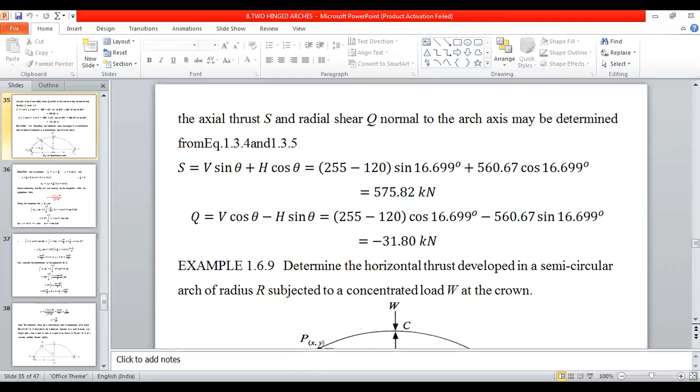So all of you see the geometric property of circle, and let us understand this problem a little bit. Trigonometric integration is required to solve the horizontal reactions.

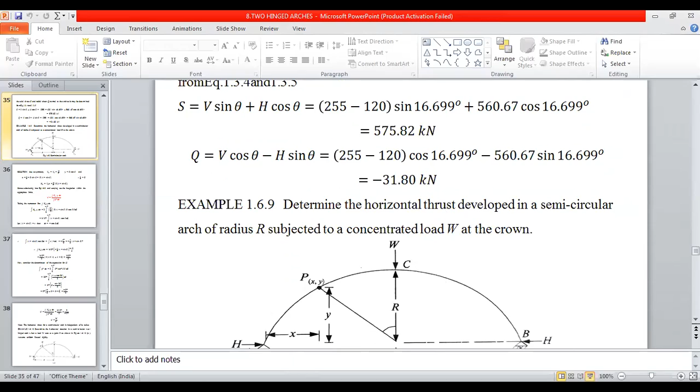See all of you, are you shared the slide? Are you seeing the slides? Yes sir, right.

Put heading: analysis of circular arches, two hinged semicircular arches. Write directly in the form of a question: determine horizontal thrust developed.

Yeah. This is the best one. Uh, right.

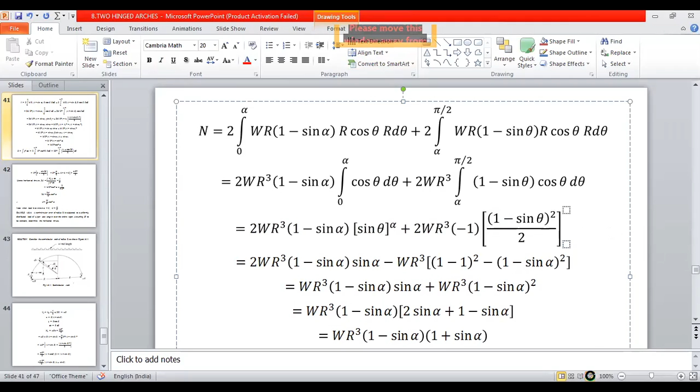Are you copying all these things, or do you do your own? It's a very simple integration, you do your own way. Did you copy? I may go to the second slide. Yes, sir.

So denominator value is pi r cube by 2. You are getting pi r cube by 2. The numerator value is W r cube cos square alpha. Then, but you know 2h, not h. 2h is equal to n by d because you are applying both sides, concentrated load applied on both sides at P and P1. That's why 2h. So 2h is equal to 2w by pi cos square alpha. This is the final solution, but h is equal to, 2 gets cancelled. H is equal to w by pi cos square alpha.

So if this load is applied at the crown, alpha will be 0. Then h is equal to w by pi. If the load is applied at point P at x distance from the left support, this is the horizontal expression. If load is applied at the crown, then alpha will be 0, therefore the horizontal reaction is W by pi. So it is independent of R when load is applied. Same derivation you will follow. Did you copy all these things?

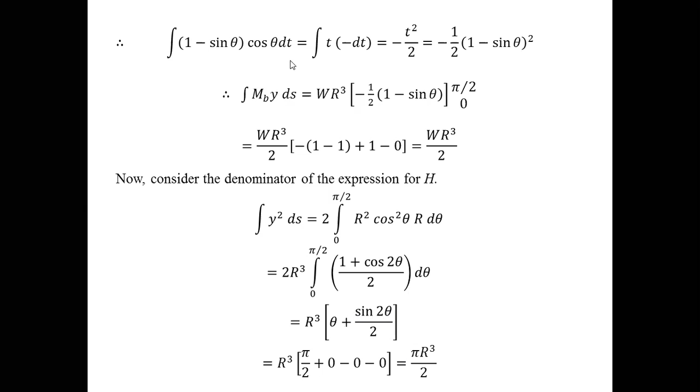Then you take the uniform distributed load. The first problem is anywhere on the arch, concentrated load anywhere on the arch, and second problem is the concentrated load on center. Arch is subjected to uniform distributed load, semicircular arch is subjected to uniform distributed load.

Let us take: determine a semicircular arch of radius r, subjected to uniform distributed load W per unit length over entire span. Assume EI is constant. Determine the horizontal thrust.

Are you seeing the screen? Yes sir, yeah. And the third problem will be uniform distributed load spreading over the entire span.

Let us copy this figure. In this figure you can understand better. You take at any point P or section X or P, it is making an angle theta with the vertical, and a small elemental length making an angle d theta, and this point the length is ds, and this point is kept at a distance x from support A, and rise is y.

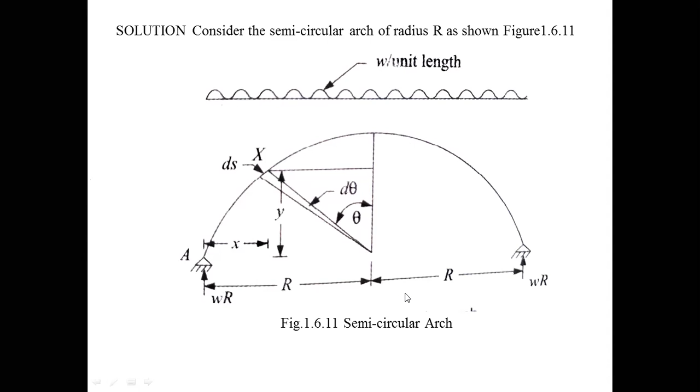Substitute all these things, the X value substitute, and simplify the numerator value WR square by 2 into 1 minus sine square theta. That 1 minus sine square theta is written as cos square theta. Then this is MB.

Then numerator MB into WR square by 2 into cos square theta, into X is equal to R cos theta, Y is equal to R cos theta, and ds is equal to R d theta. Apply the limit 0 to pi by 2.

Cos cube theta, you cannot integrate directly. So you take t is equal to sine theta, dt is equal to cos theta d theta, and I is equal to 1 minus t square dt. Do the simplification of integration this way, following the same process as before.

And you know the denominator y squared ds. How do you get it? How much do you get? Y square ds, as in the previous problem.

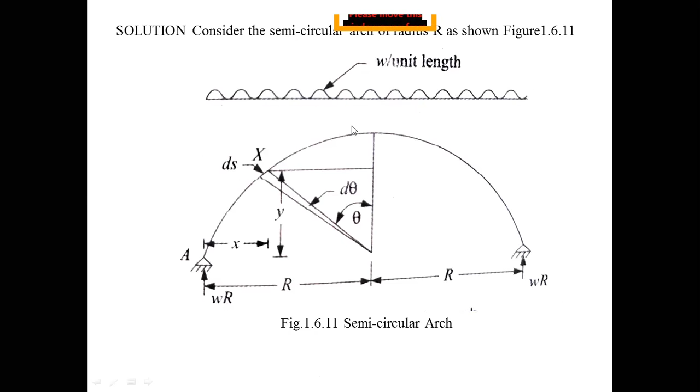You take the same procedure, symmetry, for this second problem, just as with the first problem W. What is the equation here? If a semicircular arch is subjected to half of the uniform distributed load, what is the expression for H?

Students? Hello? Hello? Yes sir. This is the expression 4/3 WR by pi in case of semicircular arch subjected to uniform distributed load. If the semicircular arch is subjected to half of the uniform load spread on half of the portion, students, please respond.

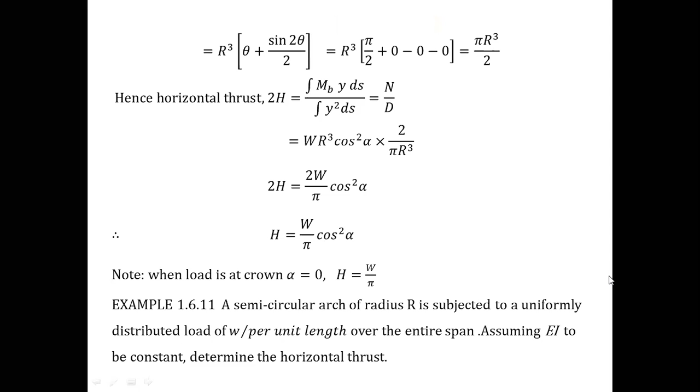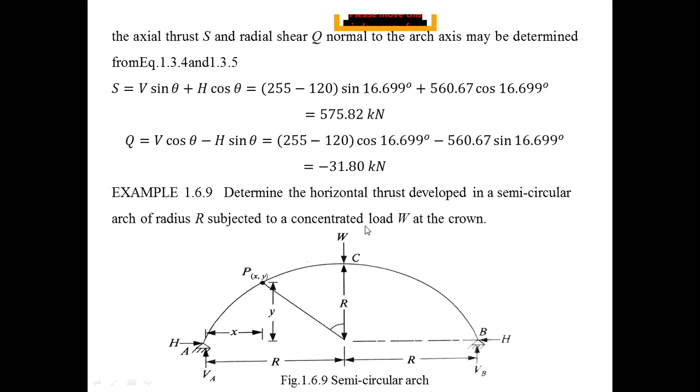Suppose for the first problem, W is equal to 150, R is equal to... and 2R is equal to 50 meters. Find HA and HB. Then you must take the whole problem and do this entire derivation with W, and finally apply all these things: H is equal to W by pi, and H is equal to 150 by pi gives the horizontal reaction. That's enough.

So, any doubts regarding the two-hinged circular arch? I will finish the third unit: two-hinged and three-hinged circular and parabolic arches, and segmental arches. I've covered these, including two-hinged circular and two-hinged parabolic arches. Actually, the examination question is the two-hinged parabolic arch, which is simple integration. Here too it's the same, but you must derive and then substitute. That is the major problem in two-hinged circular arches.

Have you any doubts? Otherwise I will stop here, and next class we will start the fourth unit, suspension bridges: cables and suspension bridges.

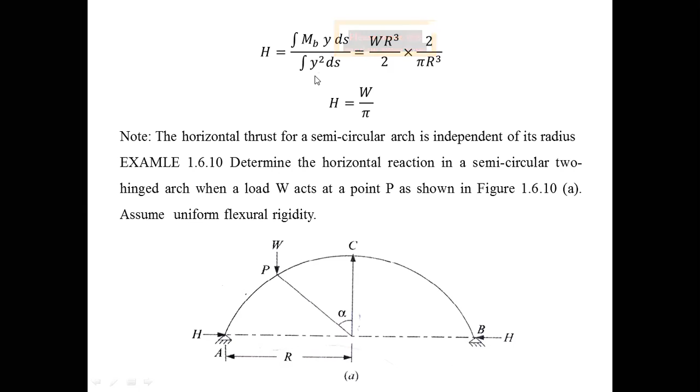Next class I will start cables and suspension bridges. If this topic is strong, that will be easy. Same similarity is there in the analysis of arches and cables. I will explain tomorrow what is the difference between a cable and an arch. Right? Can I stop here? Yes sir, tomorrow we'll start the new chapter, cables and suspension bridges. Put a heading: cables and suspension bridges.